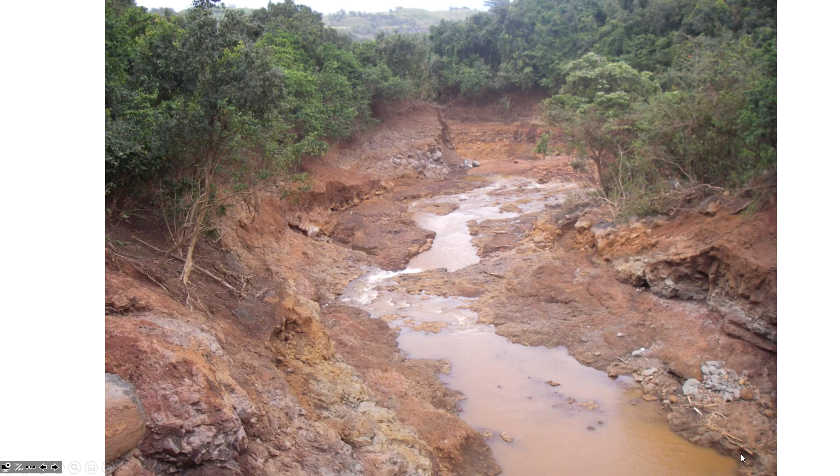All right, so this is a picture of a channel that has experienced quite a lot of scour. You can see that this is definitely not going to be considered a prismatic channel where it's not uniform. If we were to draw a line down the center of the channel, it's not a mirror image on the left and the right. Usually we like for that to be the case if it's an engineered channel, just for ease of maintenance, ease of operations. But in natural channels...

There will become an equilibrium that depends on the strength of the soil or the rock combined with the slope and topography, and then also the amount of water that's going to be going through a channel and the stream power that it applies. And so in a situation like this, it would be very difficult for us to determine the flow depth using Manning's equation because it's so irregular. But we could break it up into little sections and apply Manning's equation across small elements, and we might be able to determine the flow depth that way.

But the main thing I wanted to illustrate in this picture is just the idea that we can evaluate through geotechnical analysis the shear stress that a soil can bear and how much energy the water can be applying to the soil before erosion occurs. And so recall the shear stress formula here that says that if you know the unit weight of the fluid - so of course for water that would be 9810 newtons per meter cubed.

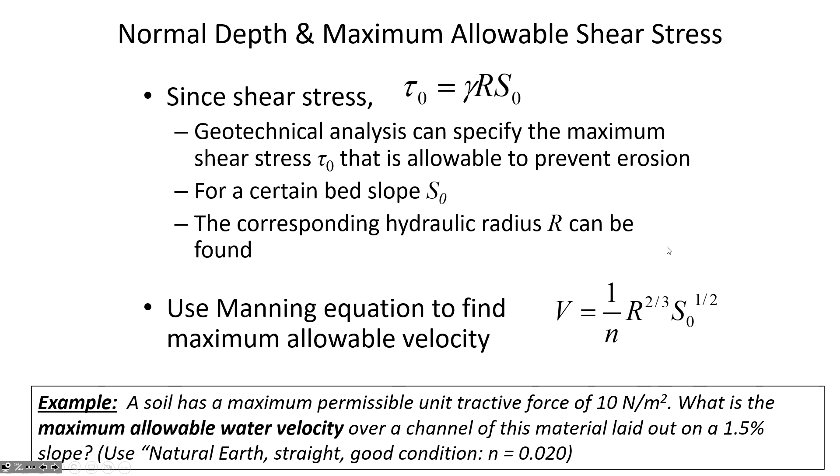The hydraulic radius that we've calculated here is 0.0680 meters. One way to think about that is it's the distance we need to spread this shear stress out over when you've got a slope of 0.015.

And when we put that hydraulic radius into Manning's equation and solve for the velocity, it turns out 1.02 meters per second is the maximum tolerable velocity.

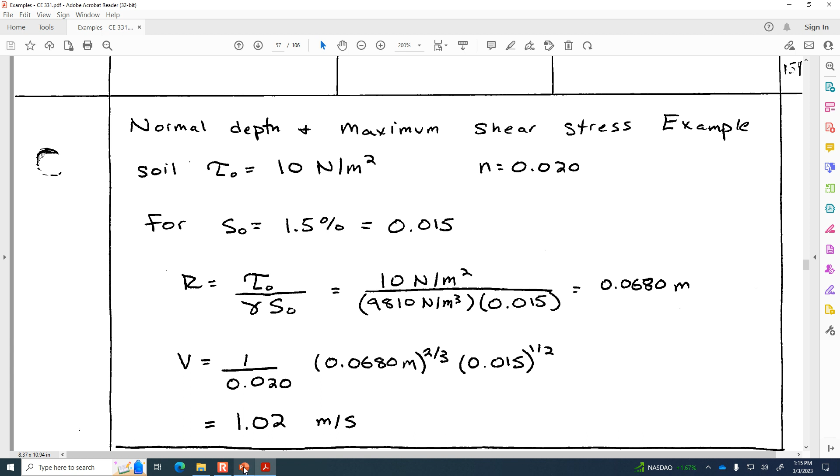In the homework assignment I've just posted on Blackboard, you have a similar problem to this, where you simply calculate the hydraulic radius and find out how high the velocity can go and the soil remains stable. Okay, any questions about this example?

One of the topics introduced in Chapter 11 is the idea of velocity profiles. You may recall from fluid mechanics the idea of the no-slip condition. It says that when you have water in a channel flowing downstream, we could calculate the average velocity.

Simply by taking the flow rate Q divided by the cross-sectional area, that gives you the average velocity. But the velocity varies depending on how far away you are from the bottom of the stream. For example, when you have water that's just barely in contact with the bottom of the channel, the velocity is actually 0.

That's where the phrase 'the no-slip condition' comes in: a fluid with viscosity can't frictionlessly slip over a stationary surface. A fluid which has viscosity, meaning it experiences friction, will have zero velocity right at the boundary of a stationary object. But the further you get from that channel bottom, the velocity increases, because there's less influence of the location where friction is applied.

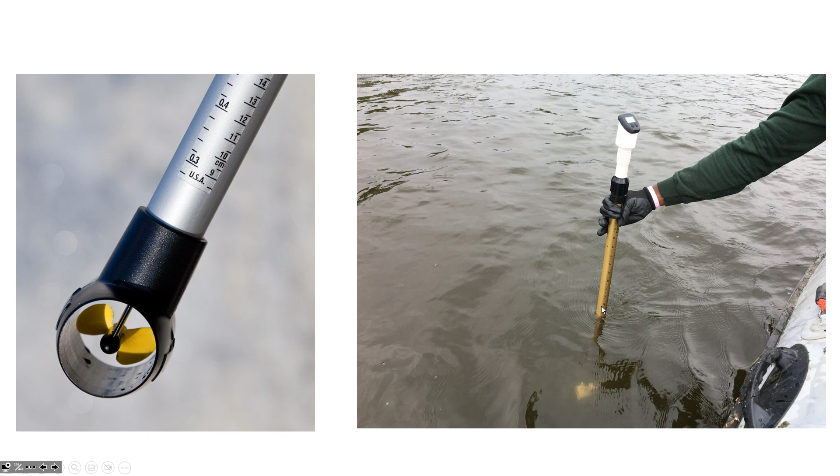One of the ways we can measure the velocity in a stream is with a device like this. You can see it has an impeller which spins, and that's metered and connected to a calibrated sensor, so a certain number of rotations per minute is set to a water velocity. This could be dipped at a certain depth into the stream - you can see it's graduated here so they know what depth it's being put into the stream.

There are a lot of different formulas that suggest how you can translate the average velocity into a velocity at a certain depth. This equation is introduced in our text - it's maybe the most sophisticated or complicated way to approximate the velocity at a certain depth y, where y describes the distance upward from the bottom of the channel, and d is the total depth of flow. In this equation, the variables are a little different from most other places where we talk about open channels.

Normally we'd use the variable y just to mean how deep the channel is. But in this equation from the book, the channel depth is d, the entire depth, and y is some distance upward from the bottom of the flow. So this formula says if you know the average velocity, you can find the velocity some distance downward using the Von Karman constant. It depends on the depth of the channel, the slope, and how far down you are.

This equation is mostly good for estimating the velocity close to the surface. It isn't as good at estimating the velocity of the flow as you get closer and closer to the bottom of the channel - it gets worse and worse at predicting there.

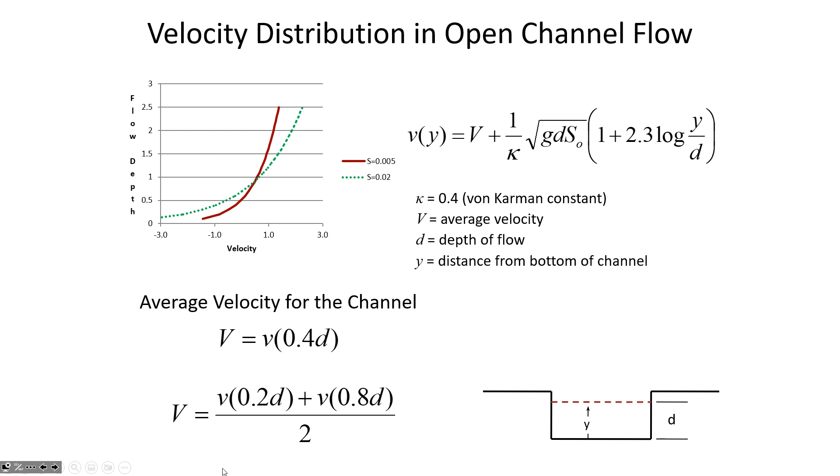So the channel that normally carries flow may be lined with concrete, or it could be grass lined, or the side areas may have riprap, which is broken up big blocks of concrete. But in the floodplain there can be all sorts of obstacles and debris which have a much higher n value. There's a variety of techniques, and probably the most frequently used is the Horton-Einstein method, which does a perimeter weighted average.

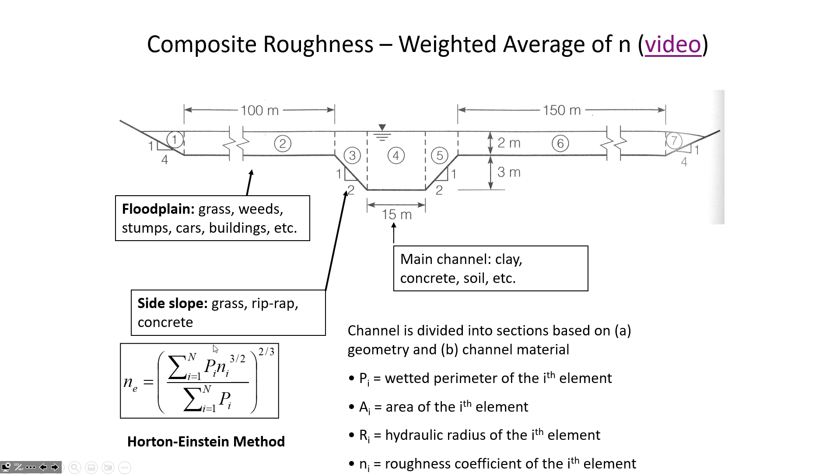Okay, so Manning's equation. What we often do is combine together the cross-sectional area that turns a velocity into a flow rate, with the area which applies to the hydraulic radius. So it's area to the 5/3 power in the numerator, wetted perimeter to the 2/3 power in the denominator.

If we have a certain cross-sectional area that's fixed, an n value that's constant, and a slope that isn't changing, because slope is just a function of geography, then as a hydraulic designer, what we want to do is maximize the carrying capacity of any channel. We want our channels to be as efficient as possible.

At one extreme, if you have a channel that is very wide and shallow, you already have a sense that that wouldn't be efficient, because number one, it's very wide and you're going to have to pay a lot for real estate to buy all the land for a channel like that. But the other issue of a very wide channel is that so much of the flow is right next to the wetted perimeter, which is exerting resistance, so it's not going to have a very high velocity if it's shallow like that.

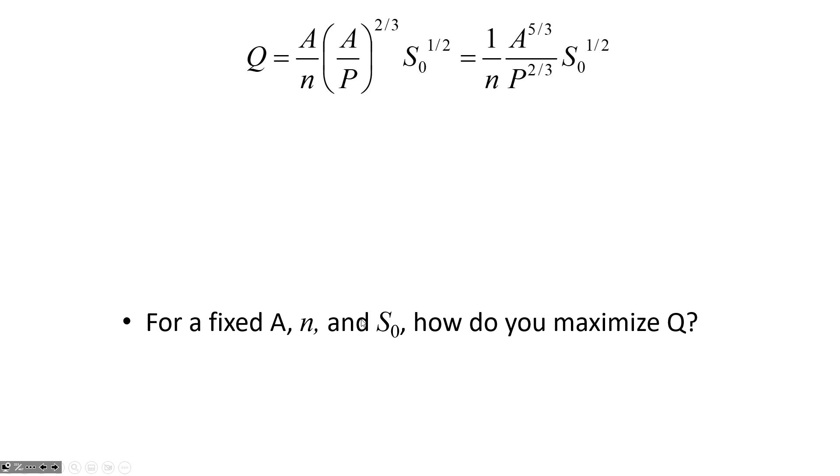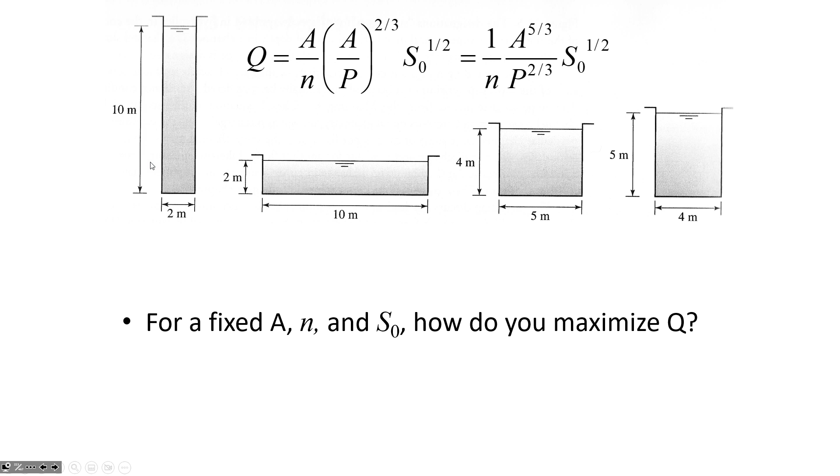If we make the channel less wide but a little bit deeper, then this flow area, which is far away from the edges, is going to have a nice high velocity, and it will be able to convey more. So taking this as an illustration, if we have 10 by 2, that's not going to be the same flow rate as a 2 by 10. The main reason for that is if we consider the wetted perimeter, it's different for each of them.

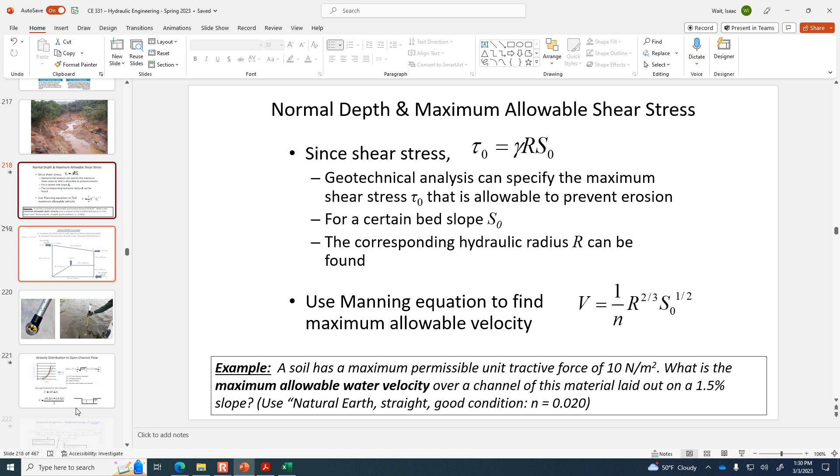So let's just put that to the test with Excel, to look at, using Manning's equation, what would be the difference in flow capacity for these four different channels. Let me copy this into a new workbook here, and we're going to calculate the flow rate for those different channels.

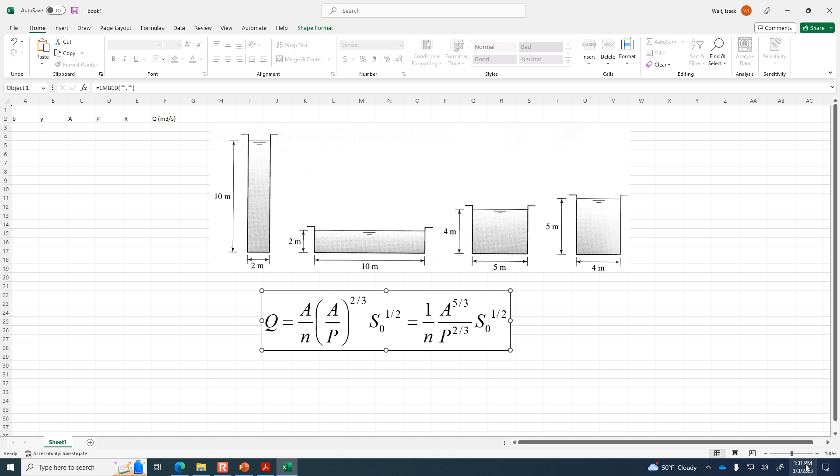Okay, so if we're going to look at different B values and Y values, they'll all have the same area, but they'll have different wetted perimeters and hydraulic radiuses. In the end, we want to know the flow rate using Manning's equation as our method of estimating flow capacity. So there's a 2 meter wide, a 10 meter wide, a 5 meter wide, and a 4 meter wide channel, with depths of 10, 2, 4, and 5. The area will just be depth times width, since it's a rectangular channel in all of these cases. So all of them have 20 meter areas.

Wetted perimeter, though, is going to be the width plus 2 times the depth in all of them. Since it's rectangular, it's the bottom width, and then each side contributes to the wetted perimeter. So hydraulic radius is area divided by wetted perimeter. Okay, so we've got these different hydraulic radii, and now the flow rate.

It's going to be the area to the 5/3 power multiplied by the slope. In this illustration it's saying a slope of 0.01 and an n value of 0.013, so I'll just hard key that in. The slope is 0.01, and that's to the power of 0.5. And now we're going to divide by the n value, 0.013, times the wetted perimeter to the power of 2/3.

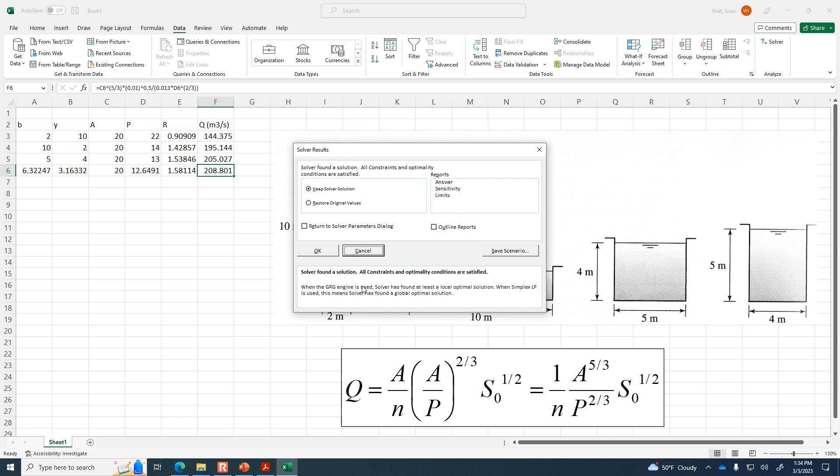Now let's see what we get. Okay, this is interesting. It says that we could get 208.8 if we made it 6.32 meters wide and 3.16 meters deep. So let's keep that in mind in this next part, because there are these definitions of the most efficient cross-section.

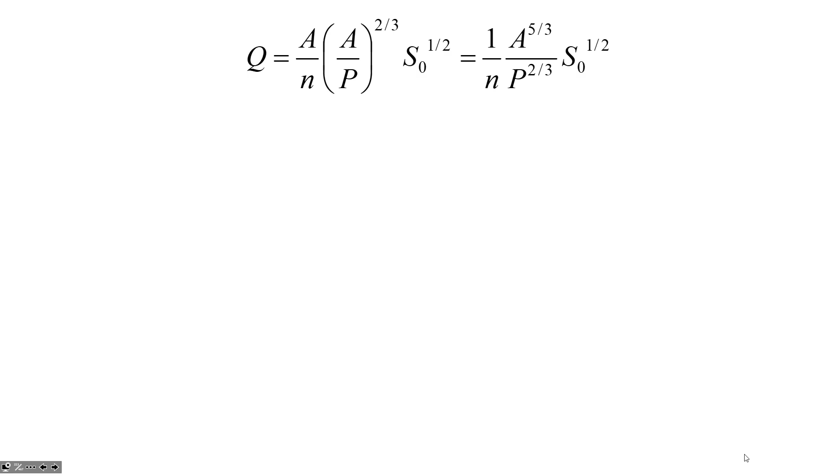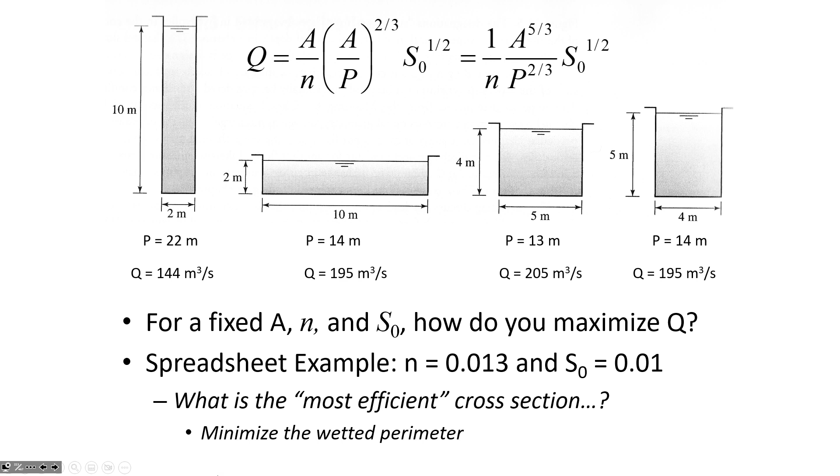The cross-section that gives you the best Q for a certain cross-sectional area is the one that minimizes the wetted perimeter. And so back to our spreadsheet here, the wetted perimeter does in fact appear to be lower than any of the others, with this combination of 6.32 by 3.16. It minimized the wetted perimeter. And here's the parameters of the best trapezoidal channel. Let me come back to this, because we're just dealing with a rectangular channel just now.

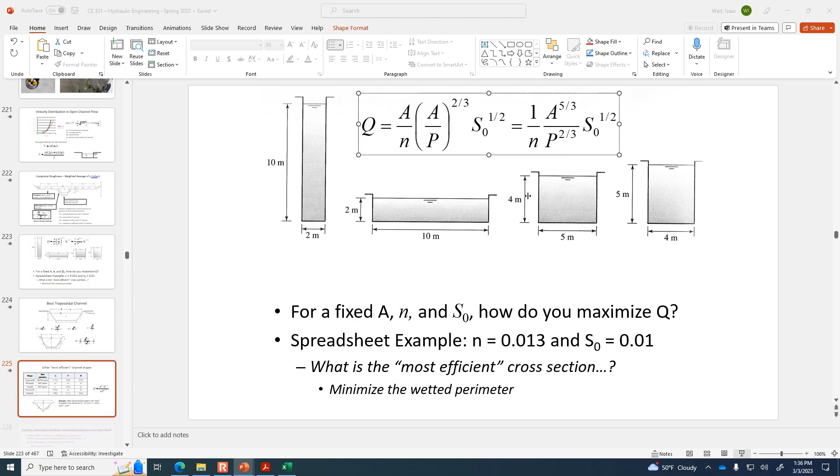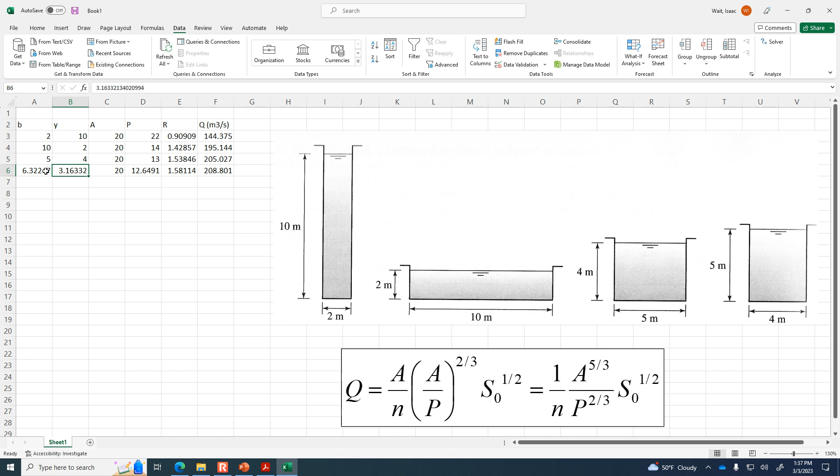Okay, so we've got some depth y, and it's saying that the width of the channel should be double your depth. Is that what we got in the spreadsheet here? The width of the channel is double the depth. Okay, so it all seems to hold up that the most efficient rectangular channel is the one that gave us the highest flow rate, same cross-sectional area as all the other ones, but for a certain depth, it should be twice as wide. And the reason why is that's the shape that most closely approximates a circular cross-section, like a half circle.

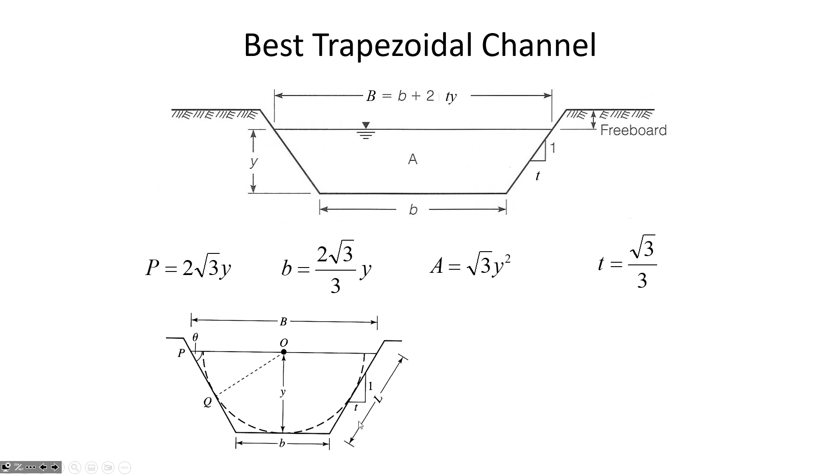And it has other parameters here, for example the bottom width, the resulting cross-sectional area, the total wetted perimeter, and so on, for a given depth. So again, the trapezoid that is most efficient is the one that most closely approximates a half circle, and so it just coincidentally would have that T value of square root of 3 divided by 3.

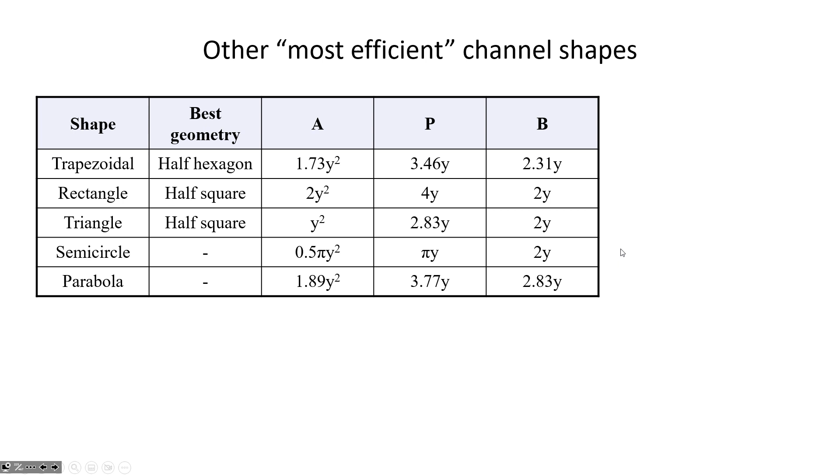So we'll do our best when we're designing channels to reduce the amount of area that has to be excavated, because digging soil and removing it from the ground costs money. So if you're having a certain flow coming out of a watershed and you need to create a channel to carry that flow, you're going to want the most efficient channel shape possible so that you reduce the expense of construction.

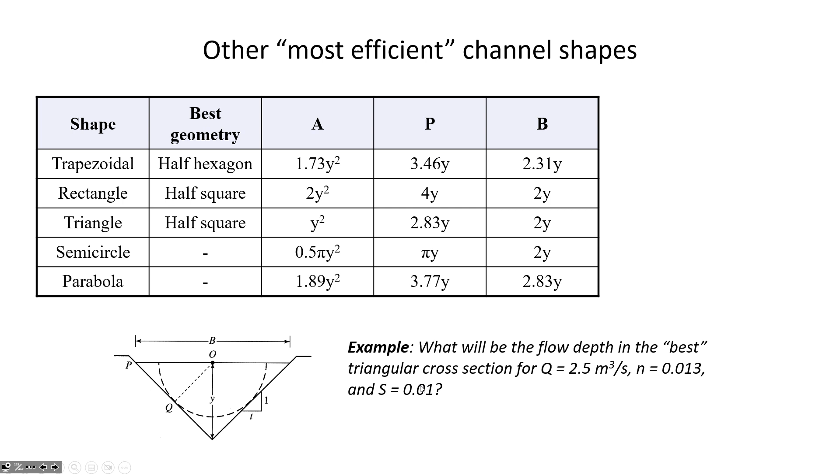Let's put this to practice by looking at the flow depth in the best triangular cross-section. If we have a flow rate of 2.5 cubic meters per second, an n value of 0.013, and a slope of 0.01, I'll show you the solution to this one because there's a different example I think is more deserving of your time.

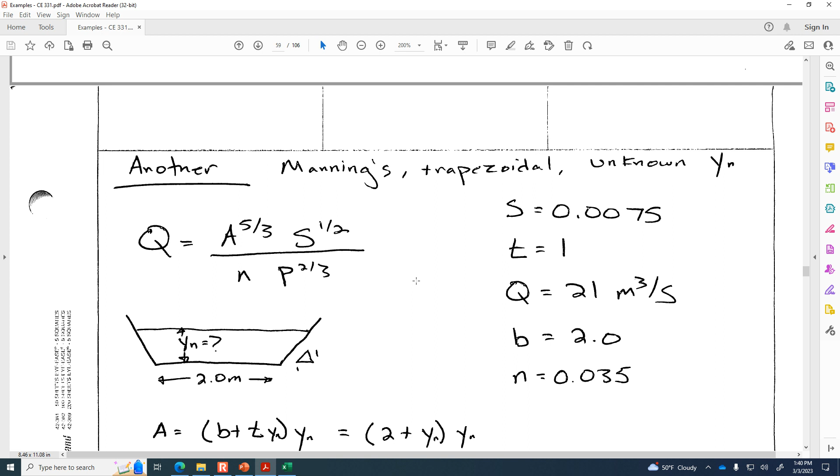So for the best triangle, we have a flow rate of 2.5 cubic meters per second. Manning's equation has area to the 5/3, and for the best triangle, the area is y squared. So you substitute y squared into Manning's equation for the area, and the wetted perimeter for a best triangle is 2.83 times y, which we put in the denominator. We were given an n value and channel slope, so the only unknown is the normal depth. If you put it into your equation solver, the depth you'll experience for this best triangle is 0.851 meters.

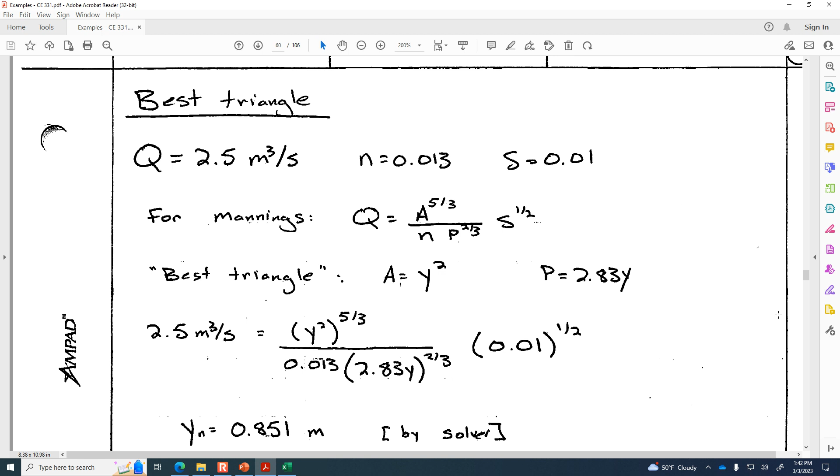So what we did in this example is define the area and wetted perimeter in terms of the geometry that results in the most efficient conveyance, in terms of an unknown depth, and that's what we ultimately solved for, the unknown depth y. That gives us now 8 minutes to look at this final example here.

This is just another instance of Manning's equation with unknown depth. If we substitute in the formula for area and wetted perimeter, this is what we're trying to solve. We've got a bottom width of 2 meters, bed slope of 0.75%, so S will be 0.0075. 1-to-1 side slopes means that T is 1. This is a grassy channel with an n value of 0.035. So we're just trying to solve for y in this trapezoidal channel.

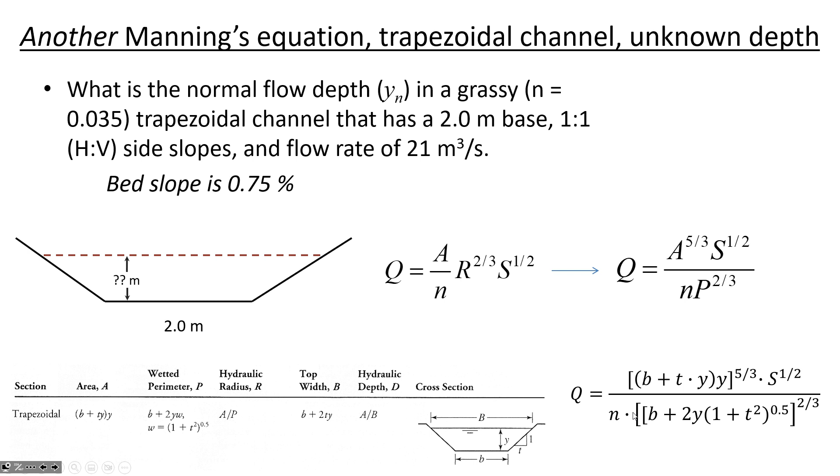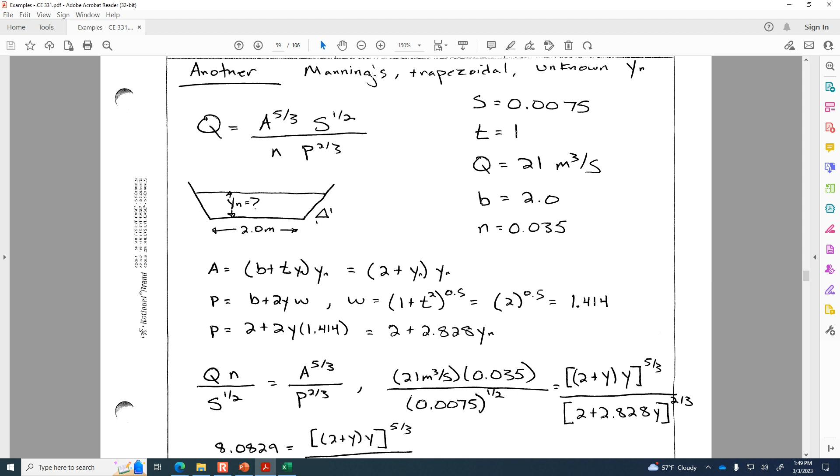I was circulating around and saw several people had 2.03, but that's not what I get. I get 1.981. 1.819? Well, I got 1.981 meters, and I'll double check that because I always want to be sure about it.

Let's just look and make sure that we all agree about Manning's equation. I rearranged Manning's equation to put all of the constants on one side and the unknowns on the other. We've got 21 cubic meters per second, the n value of 0.035, the slope in the denominator, on the left-hand side. The area is 2 plus y, since t is 1, times y, to the 5/3. And then the wetted perimeter is 2 plus 2 root 2 times y. So I think it should be 1.981.

I'll double check that using Excel, and I'll email to let you know. I'll email you the Excel and also this solution, because I think this is right, but some people who I usually trust didn't get the same thing, so that makes me a little nervous. It makes me want to double check.